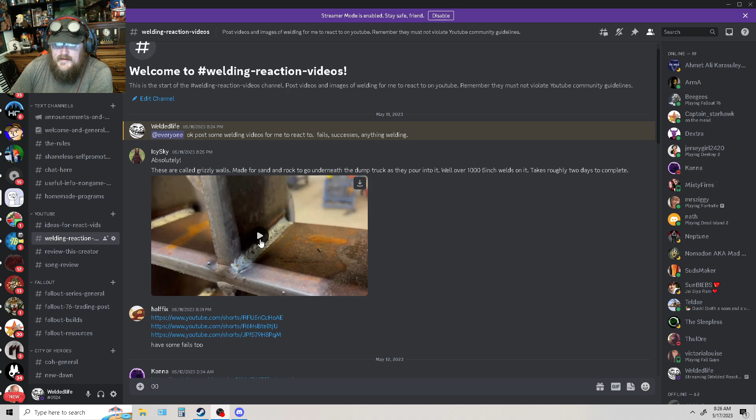No, so let's get right into this. See, and halffix has got some I'm looking forward to, God only knows whatever he's going to send. Let's see. Hold on, no, we got to full screen that right there. There we go.

Volume from... wow, that's impressive. We'll probably have to play a couple times. That is one hell of a support structure. That's not going any damn where. I mean, just look at them welds. Those beautiful, beautiful welds. You know, if you look close, you don't see really any undercut because you... come on now, cooperate.

Like even when you go back to like here, here's a good one, got a good shot of it. It's not really a clear image. I wish I could get it to just go to a clear image. If I can get to the halfway point between some of these, makes it kind of hard to see.

You don't see any undercut up here, which would be where the metal's burning away or melting down into your weld pool, which means they're getting enough metal into the weld to fuse it. Those little ones look fast to travel, and I say that because those are a little more arrow pointed, a little arrowhead, when they should be more stacked dimes. But apart from that, that looks really impressive, and what you're going to get there is a lot of solid structure.

I guess from the description it sounds like this goes up, they roll the trucks up over it on the gravel. I guess this is in the gravel when they roll the dump trucks up on top of it, and that's laying down, and they roll the dump truck or whatever on top of it. They fill it with sand and gravel. That gives it structure underneath to keep it from sinking down into the mud or gravel, or I guess, I don't know.

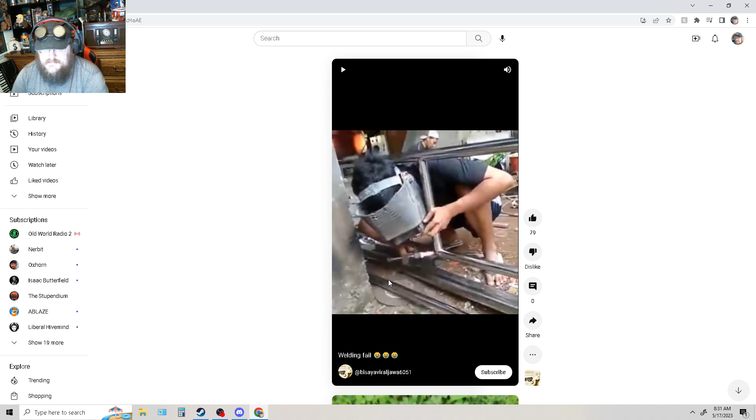He's TIG welding, okay, at least he's wearing a hood. Oh God, I didn't notice the pipe in the back. Oh. Oh, Lord.

Well, go ahead and keep welding it, buddy, might as well. I'm sure they'll get the pig grease and they'll lube up your head and they'll get it out of there. If he's dumb enough not to wear proper equipment to weld in, then go ahead and weld the rest of that up, and y'all just leave him for dead, because he's going to be that way anyhow.

God, that's terrible, it's on so many levels. It's terrible. I need to wash my mouth out from that one. And we still got more. Let's see, is that it?

So now, instead of going and getting something to protect himself with, here, let me bring this dangerous ass angle grinder over here. We went from Tweedledum to Tweedledummer. Tweedle dip and tweedle shit. Okay?

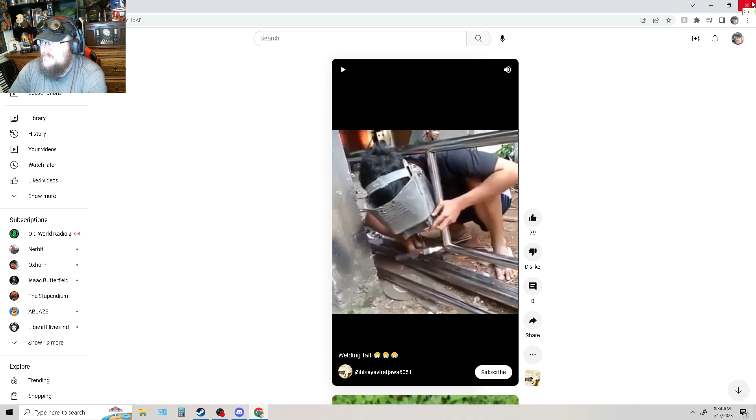Lord Father in heaven, please protect these idiots, because they sure as shit don't know how to protect themselves. Amen. I can't even look at it anymore, it makes me sick to my damn stomach.

Alright, halffix, you jackass. Alright, let's see something else. That was, oh, good Lord. Let's see the next one. Let's see what you got.

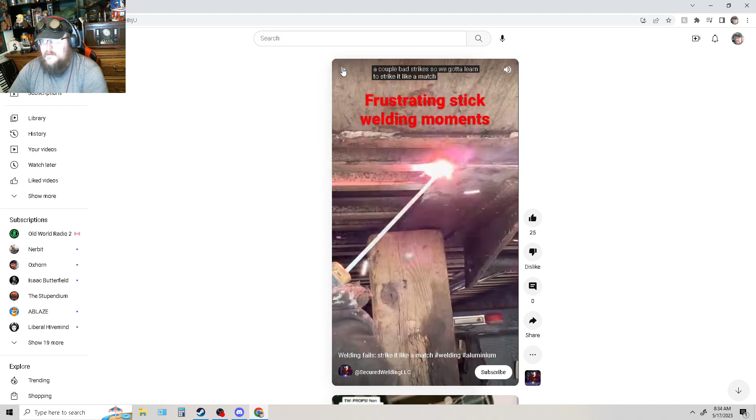As you can see in the beginning, we have a couple bad strikes, so we got to learn to strike it like a match. Hold the... but this is an aluminum welding rod as well. Aluminum welding rod? As you can see in the beginning, we have a couple bad strikes, so aluminum welding rod.

I've tried it, I've never found an aluminum welding rod that works. Yeah.

What I am seeing here in this video, so much to be said.

This looks like steel, this doesn't look like aluminum. He's up under a vehicle. I think, judging from that, he's under a vehicle. I don't know what he's up under. That would be aluminum - it looks like something structural from the I-beam look of the stuff above him. Why is he using aluminum?

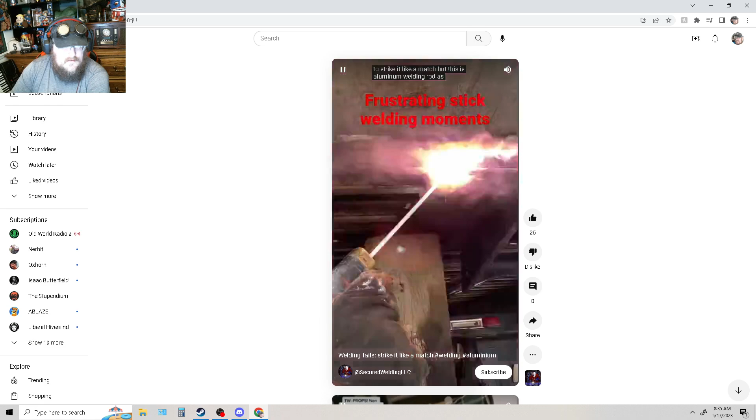As you can see in the beginning, we have a couple bad strikes, so we got to learn to strike it like a match. This is an aluminum welding rod as well. It's burning through so quick.

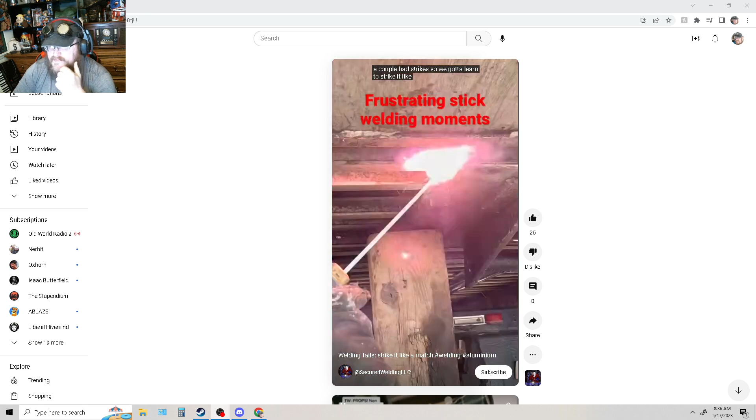As you can see in the beginning, there's a couple bad little strikes, you know. We got to learn to strike it like a match. This is an aluminum welding rod as well. Use it to plug the aluminum holes. I don't get what that's supposed to be for.

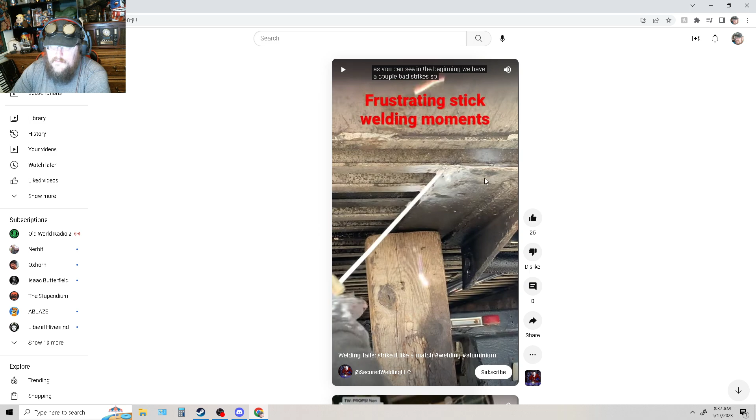Who's teaching these welders? Is it like old people who didn't know how to weld out on the farm decided, hey, you know what, tell you what, Sonny, we're going to the farm, I'm gonna teach you how to weld. And he got some old 6013, or I guess it was old 6011, for some AC welding. Got the old AC welder out and showed him how to weld with that, and he got all right with it. And Grandpa said, well, there you go, that's all I can show you. And he said, I'm a TIG welder now.

I was gonna weld aluminum with fucking MIG wire, which I have aluminum MIG wire, I haven't tried it yet. I'm eager to try it, but I will try anything when it comes to welding, but I usually have no hope in it. You're absolutely right, Icy, it's an absolute clusterfuck. It was an absolute clusterfuck.

Ugh, God, all right, what's next?

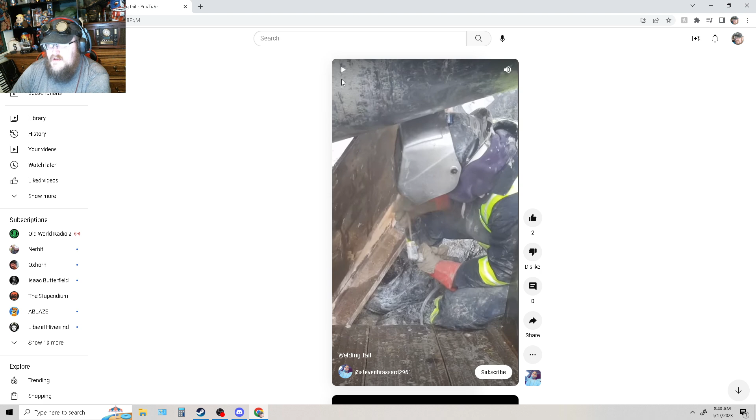Why would you do that? Jump with it like he's afraid to stick the welding rod into the stick holder. It's like he jumps and it's like, oh, I think this, I'm okay.

No, I don't believe it's an actual welding fail. I believe this was staged to look like a clusterfuck, staged to look like a suck bucket, and it's not a suck bucket, it's a fake suck bucket. That's fake puke in the suck bucket. Calling bullshit.

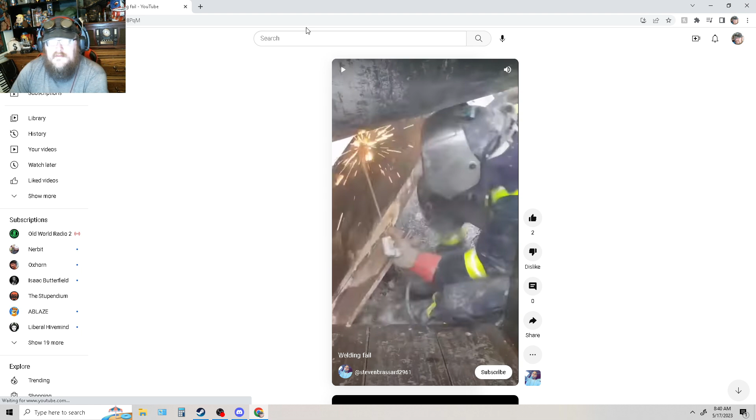Alright, what else y'all got for me today? Let's see here.

How much are they worth? A lot more than they believe. How much do you think you're worth? If I can't really see his weld too well, I wish I could see his weld first.

I'm not a big fan of hood covers like this, where they have the extra plate or whatever, because they're laying on their side or what have you. And these people look at their welds and say, well, you're worth X amount of dollars. Okay, let's see what he says.

What do you think you're worth an hour to come weld for me? $32.50, no per diem? 100 per diem? About 30 even, 110 per diem. How much? Clearly that kid knew what he's been looking at welding jobs and seeing what they pay.

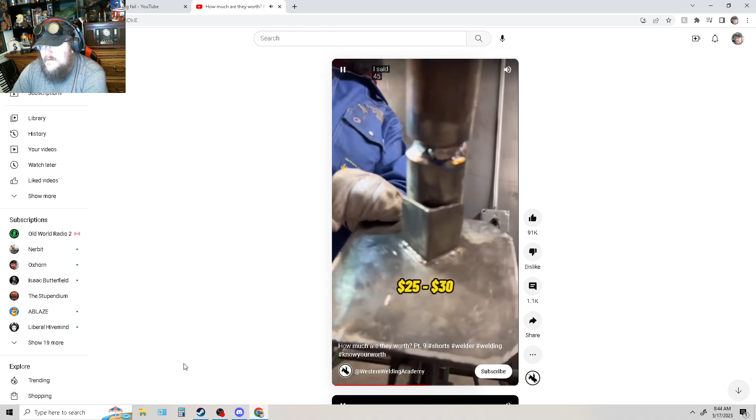Terrible. Let's see. How much is this next one worth? How much do you think you're worth an hour if you were to come weld for me? I'd say 25, 30. He's not bad. He's doing more than 30, he's like 40. 24 an hour, 24, $100 a day per diem. What?

Actually, I wish it won't let me go back. How much do you think you're worth an hour to come weld for me? 20 bucks? Yeah, she's selling herself short.

Actually, from what I can see, her welds don't look bad. Of course, I don't have a close-up look, but they look pretty decent. She is selling herself way short. And honestly, truth be told, they will pay women more per hour to go weld, to get them into the job market, because there's not a lot of women welders. Women don't generally, you don't see a lot of them pursuing a career.

I was fortunate enough to meet one female who came through our program at WKCTC. Fantastic young lady, actually I think she was older than me at the time, of course this has been a few years ago. She went out to run a project out on the Kentucky Dam, I believe, if memory serves me right. She got her stick welding certification and went out and started working on the Kentucky Dam, and went from just a welder out there with the Iron Workers Union to running that shit out there, making a killing. She was a very good welder.

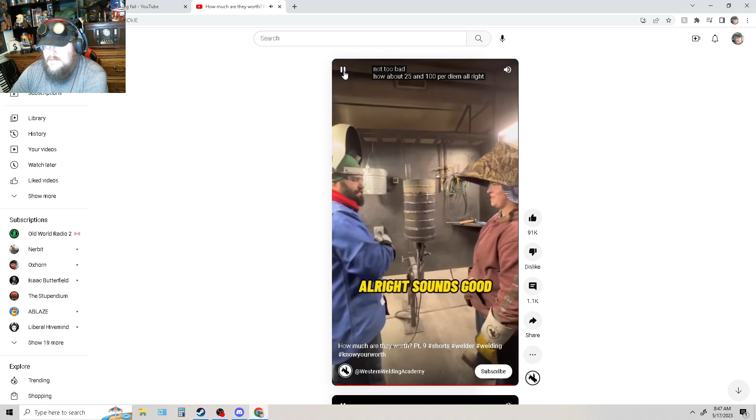So $20 an hour, she's worth 25 to 30. 20 even? Not too bad. How about 25 and 100 per diem? Alright, how much do you think you're worth?

First guy, they oversold him. His stuff looks pretty good, but I don't see a whole. I can't really get a good look at the weld. But a lot of welders, when they come through school and stuff, it's good. I think Western Welding Academy.

So looking at this, I'm glad that they tell them what they're worth. And it also regionally will depend on how much you're worth, will determine how much you're worth.

Being a stick welder here in Western Kentucky is not worth as much as being a stick welder out on the West Coast, because the West Coast wants less of, they want more green or environmentally friendly stuff, and they see that smoke coming off that flux, and they're like, oh, pollution. But they don't realize that TIG is done with argon, and they're already breathing argon. It's already in the air. You're not changing anything. It's actually extracted from the air when they make oxygen tanks for hospitals and stuff like that, when they funnel off and do all this. So there you have it.

So that one, I'm glad that there's a school that kind of tries to tell them what they're worth. This, of course, you can tell it's stick welding, $25 an hour stick welding. That's just your run of the mill, people showed you how to do it out on the tractors, welding together old frames. Oh Lord, alright, let's go on to the next one.

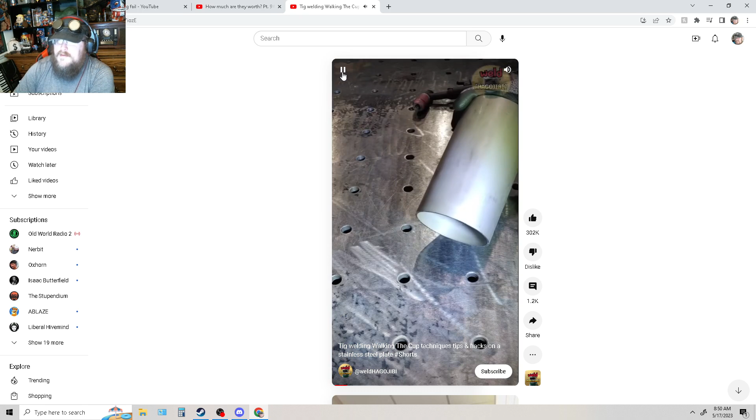No, okay, that technique, it's like walking the cup. It's basically like when you take a box and you have the two corners, and you pick one up and you do it like that. It weaves the tungsten tip in a certain pattern that you get that, and yeah, it looks pretty. And I don't know how well they hold up. I've never had to bend test somebody's TIG weld like that.

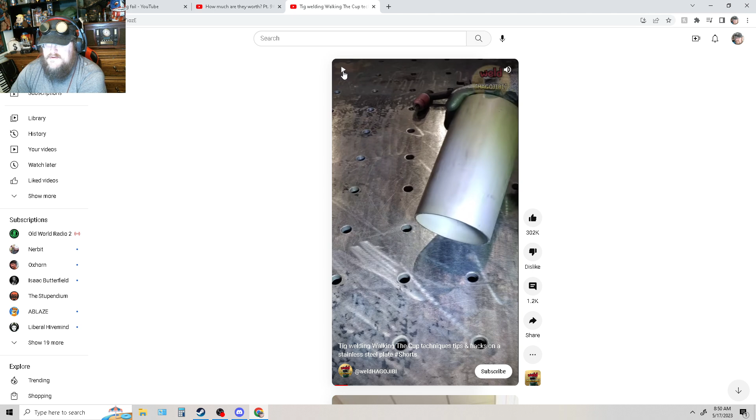So they're going to show you how it's done. Okay, show me how it's done. Seems like a lot of extra movement. You could just go bit, bit, bit, bit, bit, bit, you know.

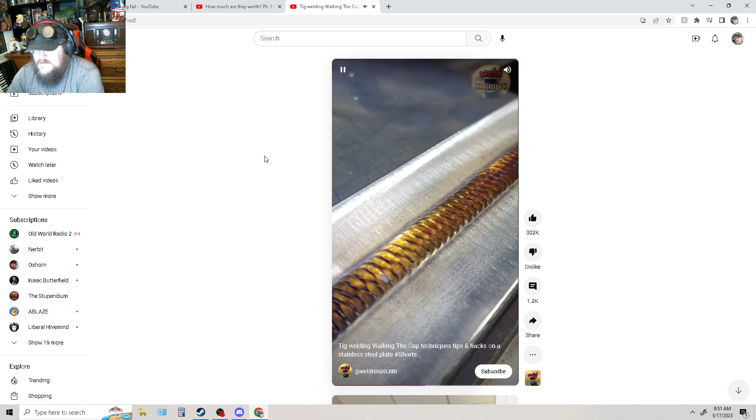But the minute you slow your ass down, well, they're not even using filler rod. Not even using filler rod. Yeah, of course. Oh, they just drag the rod. Okay, it just runs across the rod and fills it in. Yeah, I've never seen anybody really do this, and people brag about being able to do it.

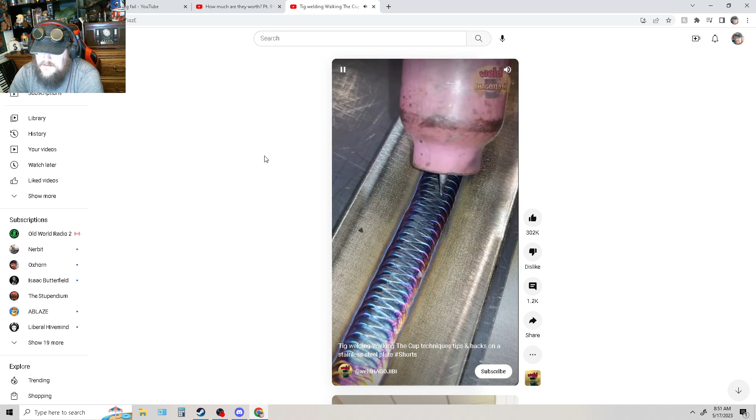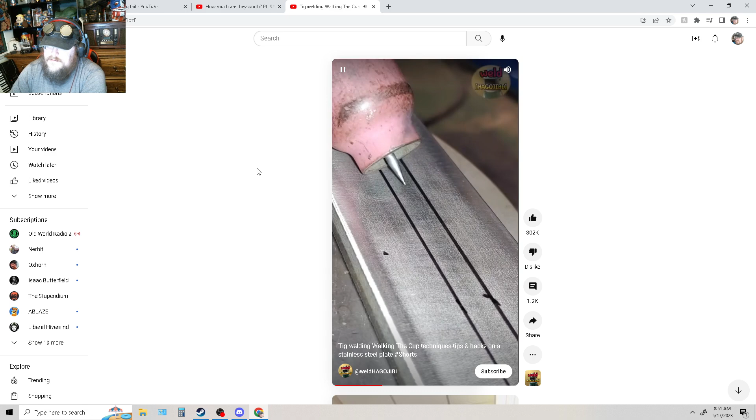It lays a really pretty weld. It does, it does look pretty. Everybody loves the rainbow pattern color it leaves from the heating and cooling of the metal at certain temperatures. See, it looks good.

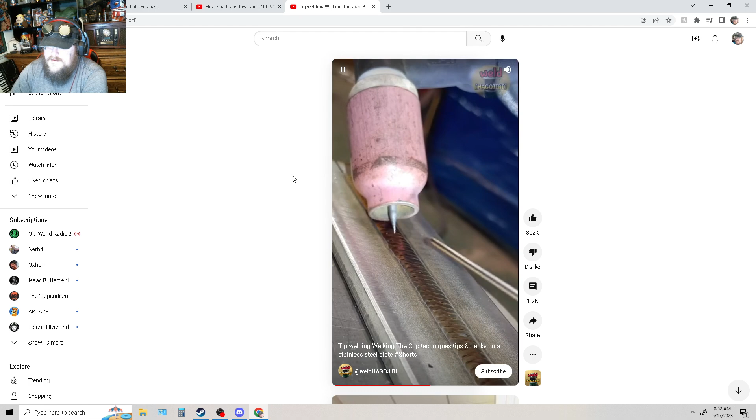It's just a very showy and flashy thing to do. It's literally that's what it is. It's not a bad way to weld, it's just very flashy, like, look at me, let's me show off how good I am at welding.

But realize you're going to do all that twisting and turning from back here on the handle. There are TIG torches you can get that allow you to hold it like a pen, which would be more ideal for doing that weave pattern. There are TIG torches like that. Otherwise you're going to have to hold up here, and if your cable slips coming off the back of that torch, it pulls that weld.

That's another reason I'm just like, just weld it regular. Don't try to do the fancy stuff. You're getting just as good a weld doing it without the fancy stuff, and lay however many bead lines you need down, stack them up. You're trying to overlap two bead welds and just be done twice as fast.

I'd rather have it done at regular speed for the two bead welds and have them overlap like they should. And there's nothing wrong with this if you can do it.

I'm sure the welders come out in here and go, "What the hell are you talking about, Welded Life? Why are you being a dick? Why are you coming down on me?" Well,

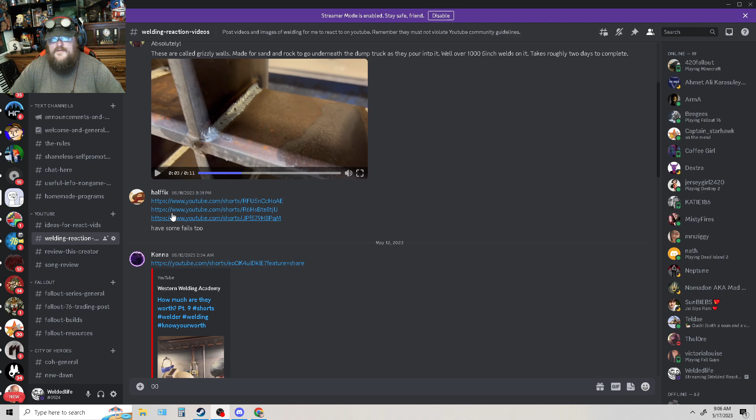And Halffix, of course, was a Fallout 76 player, and Icy Sky is a Fallout 76 guy. I'd like to get all y'all into City of Heroes too, because I really like what the Welded Fam does.

All right, mesmerizing weld. This is one of those things, like people who watch cyst videos or pimple pop videos. I can already tell what this is going to be. It's going to be a machine weld, possibly, or somebody's doing it by hand. The precision right there makes me think it's a machine weld. But let's...

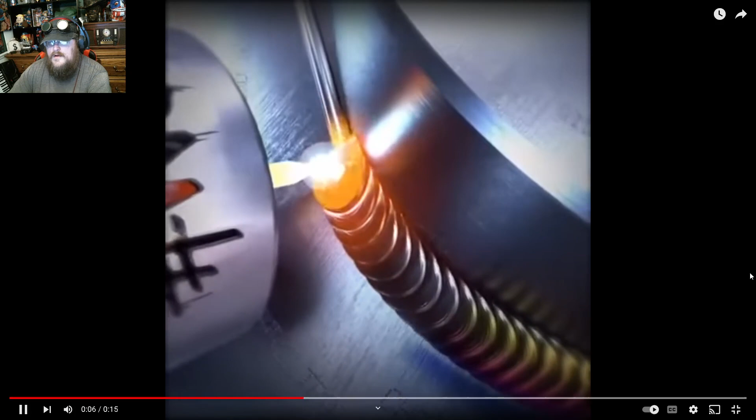Do we have any sound? No sound? Oh, I don't get to hear the sound. That tip looks like it's way too close, but it's stacking nice, so they're running low amps and dabbing. This is by hand.

Oh, it is 'How to kill all mosquitoes in the area in 90 seconds.' In 90 seconds? Well, if whatever you're using to kill mosquitoes in the area takes 90 seconds, I don't want it anywhere near anything living on the planet. Okay, bud. But...

It's just a beautiful thing to watch. I could watch this on loop. I could do this as a screensaver and just get that little area there and work that video so there's no fuzz at the beginning, where it fades out at the end and kind of gets fuzzy at the end. Just work it from right there, and find a place where it's just going to roll into it.

Only thing you'd notice is if you ever pay attention to that, or the printing on the metal on either side. Oh, it's gorgeous, and it's stainless. I'd imagine this is stainless steel just from the look of it, and the way any metal, any steel in general, is going to pick up those colors like that. But I want to think this is probably stainless, just because this polish has a brushed nickel look, the brushed metal look. It's got angles. It's probably stainless. This looks like some kind of machined part for something that they're probably not going to want to rust up, so it's probably stainless.

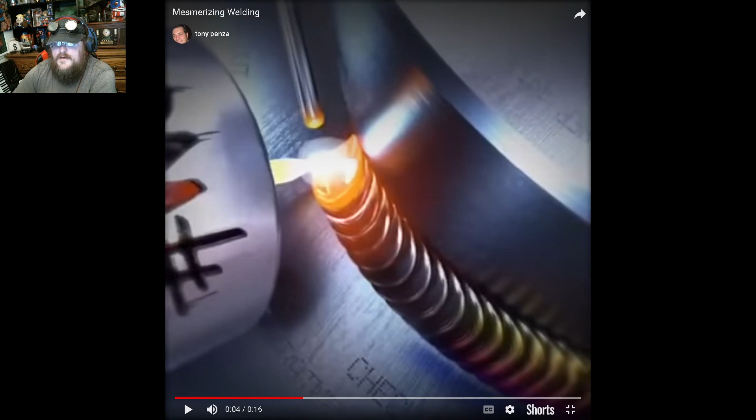Alright, here we go. So here's a good example, like when you're looking at this, we'll pull this out of here, get rid of that there. Let's pull up the video, and we'll pull up this, and we'll size it a little better. Maybe I can size it just a little bit. There we go. So this gives a good chance to look at the yellow, this residual heat and the colors it turns it.

Like when you watched Forged in Fire, you always hear about them. They'll quench the blade in the oil. It'll get really hard and brittle, and if they drop it or were to use it right then, like to hack at something, odds are the blade would shatter because it's become brittle. They superheated it to dark yellow, bright yellow, somewhere in this range, and then dunked it. I mean, I've done a quench as low as 1700 degrees. A lot of them like to do the bright yellow because it's just more spread out when they get.

Within that, it cools down, it comes back down to its gray with the black, or the regular gray. And then they talk about bringing it up to a dark straw or a light straw color. You want it somewhere between these two when you temper it. A strawberry blonde is basically what it kind of looks like.

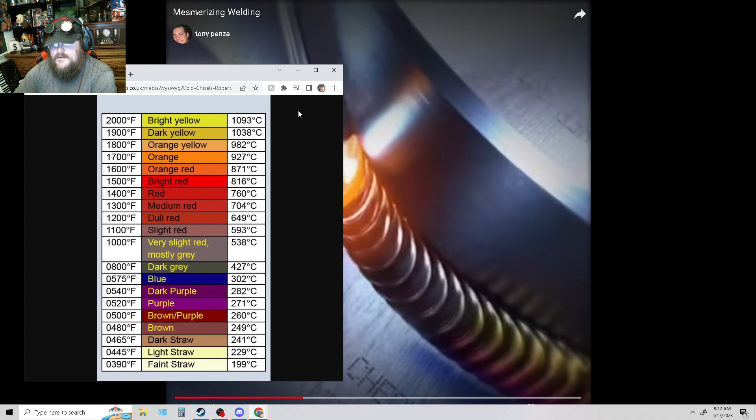But what we got here, down here, I can see purples and residual heat. It's cool where it cooled down first, but it stayed hotter up here. As you watch, this is what cools first and what stays the hottest, and the heat's traveling up this way. And it's really neat when you realize that went to 2,000 degrees right there. Of course, this up here is 2,500 degrees. If you look at the weld itself, I don't think that's right. That doesn't seem right to me.

When you heat steel, you start with a blowtorch or whatever you're using and intensify the heat. Sometimes you'll get it hot and think it doesn't look like much, maybe a slight red, but then all of a sudden it starts to get real red, and then yellow and orange, using a forge.

I'm gonna redo my forge here soon. I'm gonna get some of that Kaowool inside of it, making it a lot lighter and more portable. I'm gonna put a tray on it too, so it can house my propane tank. I use a small propane tank, not one of those big ones, but I want a place for it to sit underneath.

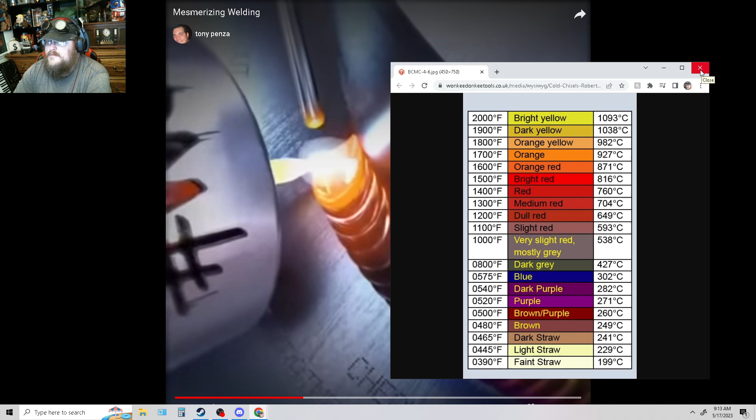So that's basically what you're seeing there, and that's where you're getting the heat that drives that color. If there's any question about that, it's always a beautiful thing to see. Like I said, I am very grateful to have seen that video.

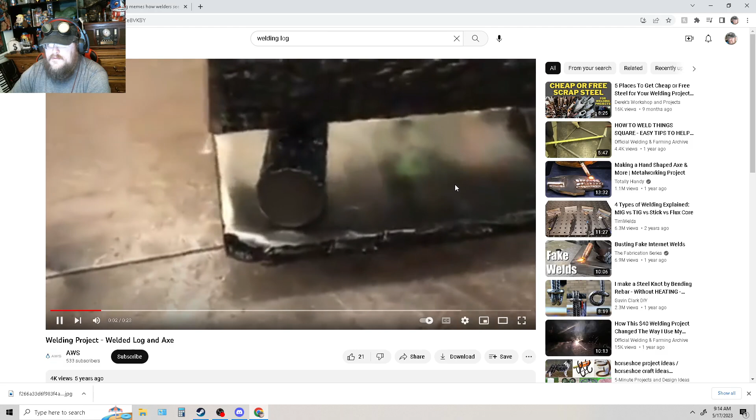Let me look up something here on YouTube, see if I can find it. Somebody did, here it is. And this is not the only one, I've seen others like this, where they've spent time making an actual log. It looks really good, I've seen better, but that one is still amazing. I'm not knocking this guy here on AWS, American Welding Society. Is that actually AWS? AWS Speed Glass? What? Well, I don't think this is the actual American Welding Society.

Okay, let's get back to these. Yeah, yes, I have caught fire other times. That was just the most remarkable burn I'd ever received, just so you know. Because my shirt wasn't pure cotton, it was a poly-cotton blend, it fused to my skin in spots, and I had to rip it off, and chunks of me came off with it. I kept that shirt, trimmed it up, patched it in the front, and stitched it up just so I could say, this is my burned shirt, this is for when I want to go get myself set on fire.

Alright, next. When I'm here, it's like nothing else matters. It's like all the troubles in the world disappear for a split second. It's just peace, it's peace. Just me and the beautiful white light. Until that first bit of flux lands in your ear, and then all hell breaks loose.

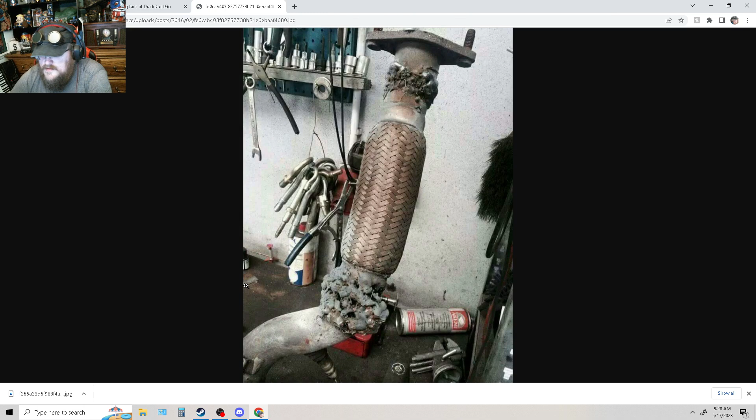Images, welding fails, oh the fun begins. What in the corn cob motherfucking bullshit is that? Will they top it off with JB Weld in there or what? Let's look at this, just put a little primer on there, grind a little bit, throw a little primer on it, nobody will ever know. The fuck is that supposed to be? I mean this looks probably something automotive, I'd wager, but what?

Oh. I guess everybody just wanted to send me videos. Y'all could have sent me these pictures too. Alright, let's see what we got next in this... Oh, Lord. I'm going to say...

Were you welding downhill or something, trying to vertical weld downhill? Had to restart a whole bunch? We just start a little weld, I'll build it out from the sides, and then we'll try to weld. I don't know what the hell happened here. This is... oh, it makes me nauseous to look at. Like I've done welds that just start getting too hot or running funny, and you're just like, what are you gonna do? I mean, nothing you can do, right? Well, fix it, but that is just on a whole another level.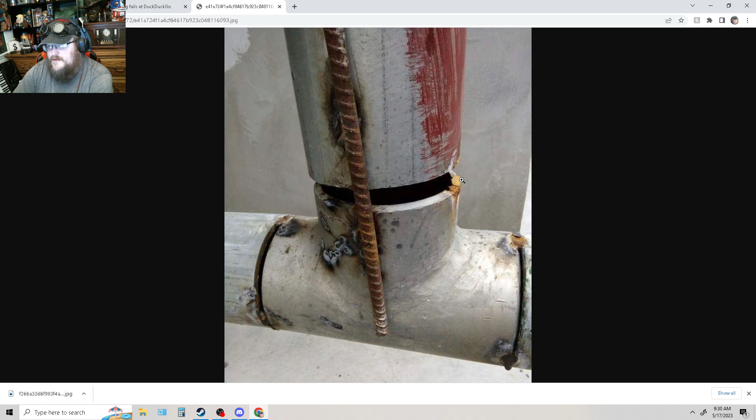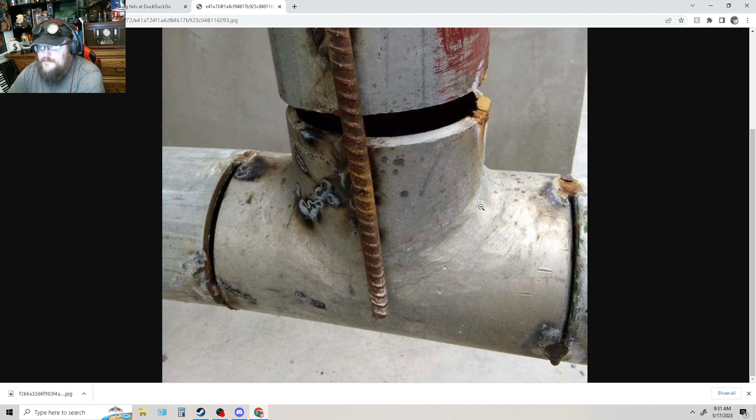What? You tack welded a rebar on to guide your piece into place, to hold it in place. What? Maybe he tacked this on here to hold this piece in place for all these welds. Even still, when you go to weld that to that, you're going to need to make sure you grind that piece flush. He's cut it off of something else too. See, here's what's happened, folks. I can see what was to be a pure mechanical failure. He welded that, I can't tell if maybe he even welded it up here. It's been cut free, like he tacked it — here's some tack weld, tack weld, tack weld, tack weld — to hold the pipe in place, right?

Okay. And he tacked it, he went to that first.

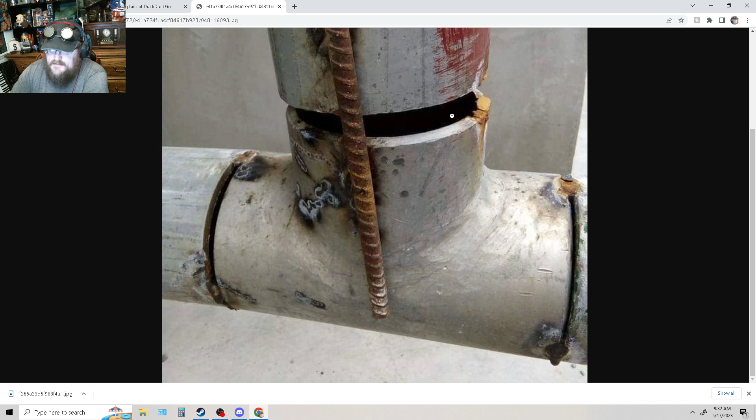But so many questions. Is he gonna need a ring, or what? I would check, dude, you're gonna need to check your blueprints. The ones that don't fit, you may have to put a piece over it and weld on. I don't know if it's gonna require a smooth transition. Some things you can't just — I can't remember what they're called — a piece around it, a metal piece that goes around it. Slide it on, slide it down into place, then zip around the top, zip around the bottom, and it's welded on. I'll tack it in place and then do that. But he has clearly had to cut that loose from there to make that fit to there — definitely check the specs and go see your manager.

That rebar is unnecessary. You already got it tacked in place. Why did you — maybe he tacked that so he could set it up there right. I don't understand, why would you do this? Oh, so many reasons, I'm gonna just scream. And rebar's hard to weld — well, it's not hard to weld, it's just ill-advised. Unless you know what you're doing. And clearly they've gotten desperate, so they obviously don't know what they're doing.

I don't like pipe welding. I hate pipe welding, that makes me nauseous to think about. Alright, let's see what we got here. What is this? Oh, it ate away at the end there. Oof, what are you... I don't know what that is.

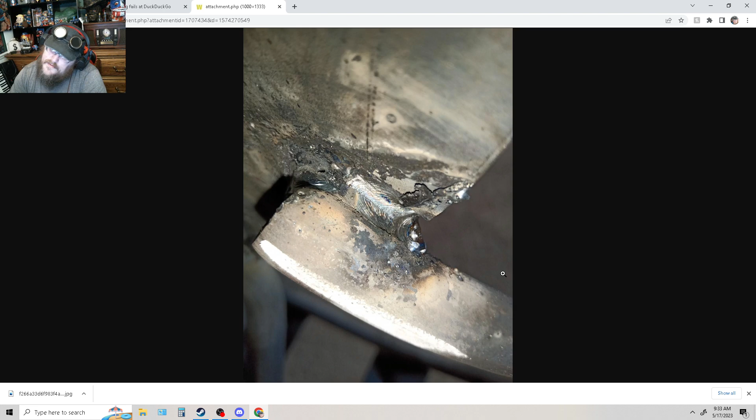But no, I mean, you had the heat on too much, and the metal's too thin over here for it to be coming all the way out. Shouldn't have come all the way out. You probably should have come all the way down. Maybe — I don't know what you should have done there, but whatever you did, you done fucked up. And there's a sharp edge down there. Fix it.

Probably have to use some MIG and build it up — little pop, pop, pop, get you some metal on there. And I would build it back up this way, because this is what's going to get eaten up every time you do something with that.

Nope, nope. I've seen some shit welds in my day, and some of them are still there at the school. They kept them on the failure trophy wall. There's a whole metal rack in the first classroom that has a bunch of shit welds. Some good welds on there too, but shit welds there as well — like the wall of fails, the shelf of fails. I don't call that a failure, except for...

It looks pretty good. You had a little issue right in here you could smooth out. Were you trying to see how that pattern is? You remember that video we watched earlier? That one right here.

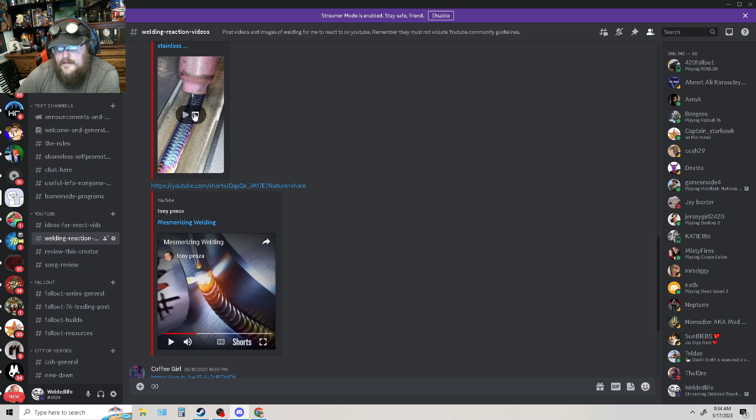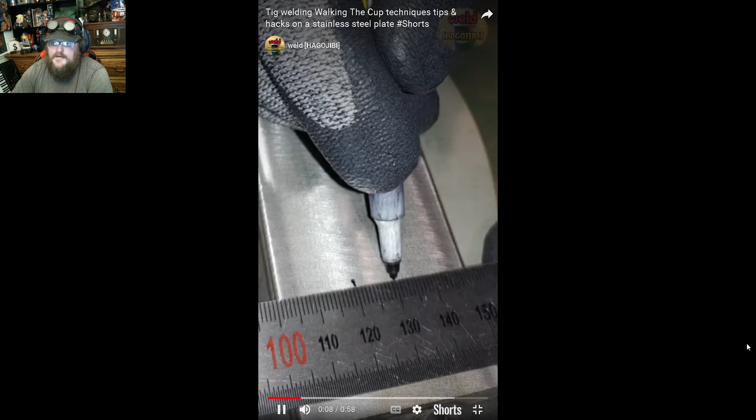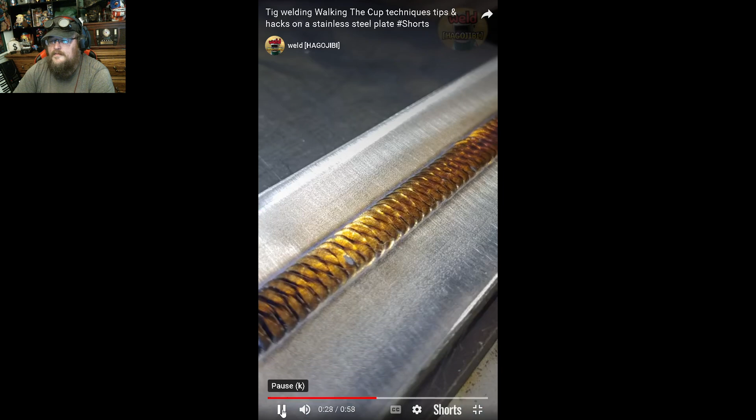This one right here. See that little pattern? Watch the pattern. Come on, yeah, okay, we see it. Line your stuff up. That little pattern right there that it leaves. Let's see if I can catch it on the screen. Show me the pattern, show me the money. Ah, see that little pattern right there? It looks familiar, doesn't it? Looks an awful lot like that.

Well, that and that are similar, only in that they both tried to do the same thing.

What up, Captain? I'm not going to be on the Discord today for right now. I'm doing this portion of the video without audio, without Discord, because we're doing fails. I got one more fail to watch, or success. It looks like it's going to be a success. But I thought I'd look at some weld fail pictures, and that ain't going to hold up.

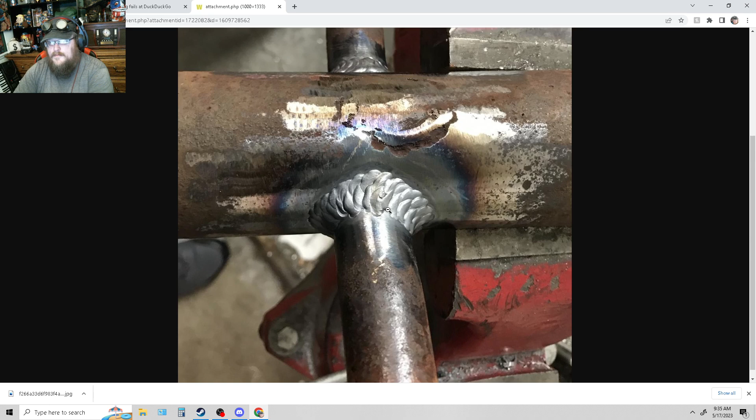That spot right there where my mouse is, it's not got penetration. It should look like that, the one on either side of it. They're trying to do that rocking technique, and it's not grabbing. Some of your welds that overlap aren't grabbing fully. It should look smooth, like butter. Right there, and it ain't. You've got a lot of ripples in your weld. So whoever's doing this is trying to do that rocking technique to make it look cool, and they're not.

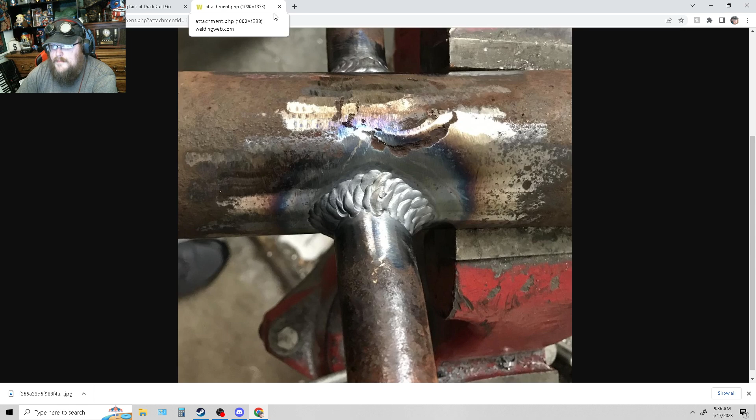This weld will probably hold for a time. I'm hoping it's not, like a pipe fitting thing. Hoping this is some kind of structural thing, or maybe not structural. Well, hopefully it's structural or something that's going to last, because if it's got any kind of high pressure on it, it's probably not going to hold. Maybe this is an art piece, hopefully. Awful.

Let's see, what else we got on the... What am I looking... What? Oh, Lord.

But somebody's getting fired probably over this, or they're going to be off the job for a little bit. They're going to be unemployed, temporarily not on site to earn their pay. MIG wire, and the spools that produce this much wire are fucking expensive. Fucking expensive. Let's say it again. Fucking expensive.

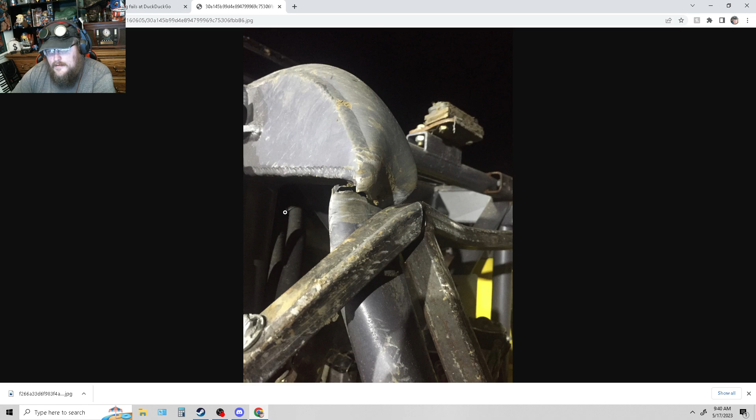Oh, see, this isn't a welding fail, but I like that they put that on there because I can see this looks like this was all one piece. It was welded here and welded here. The welds held up, ha ha, but that ripped away. That metal ripped away. Why was this not welded? What the hell? This looks like it belongs attached to that.

Ugh, anyway. Ugh. Gross.

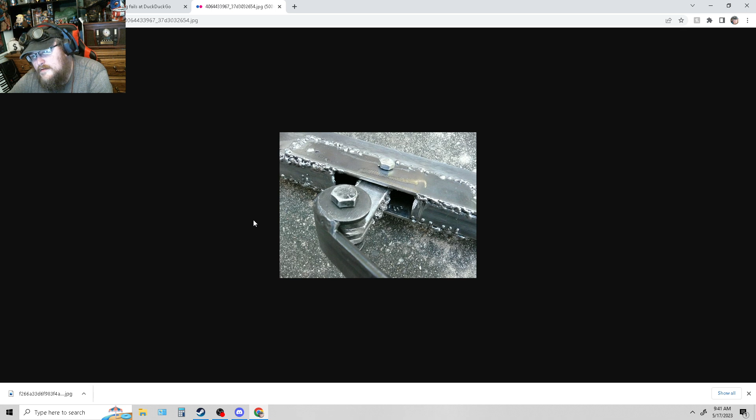What? What? What? Oh, what was it? I just want...

The welder took a picture of this because they were proud of it, I'm sure. Looky what I made, mommy.

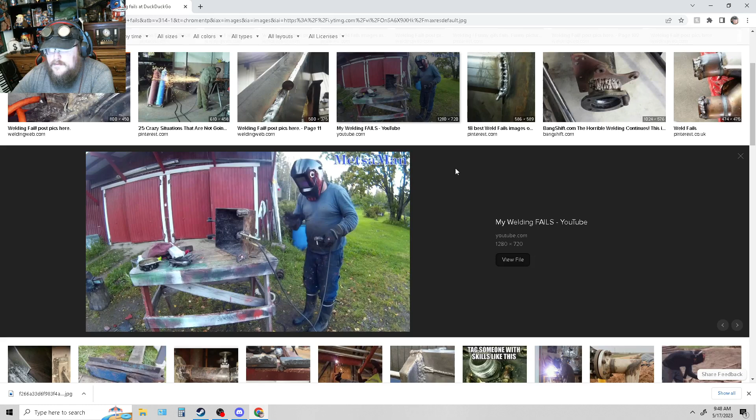What? I don't understand what the weld fails. Don't. Oh, what?

Well, this weld looks like it's going to just lash out and bite you, with some savage ass teeth. Lordy mercy.

Hey, I put that new exhaust on for you. Why would you take a picture of this to show? Maybe it's the customer showing this off, going like, yeah, no. No, man, that's no.

What? That looks like... that, I don't know what that is. Looks kind of okay. This looks like a hot mess. It doesn't look like it grabbed up on the corner of the piece over here. I can't really see, the image is too small.

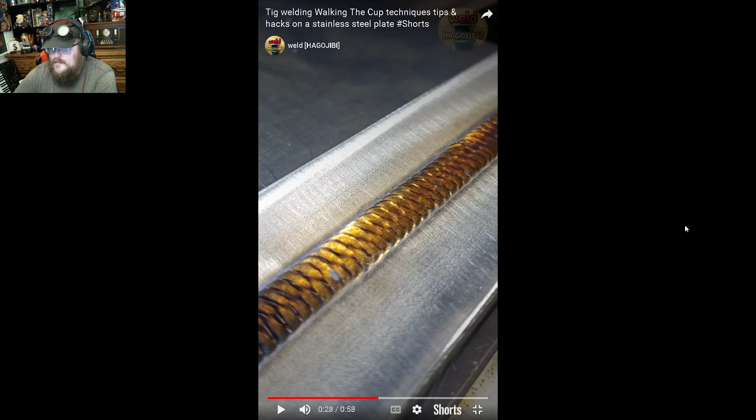Alright, for the pièce de résistance, it's time to review. You guessed it: Handmade Steel got dragon. What?

Got dragon, okay, Game of Thrones dragon. Okay, it's like got dragon, that makes no sense. Okay, see how much I've never watched Game of Thrones. Don't judge me. I played Dungeons and Dragons growing up in high school, middle school, some college, and we just played it way too fucking much. I got burnt out on that whole era.

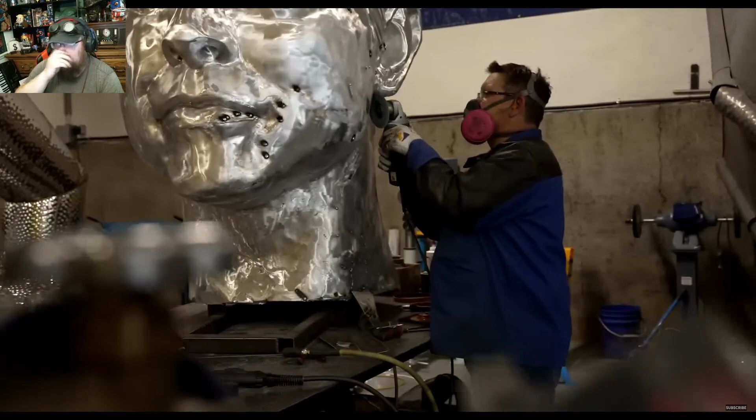T-Rex. I had a hot rod shop before this. My artwork started to take off and it became full-time work for me, and it wasn't something I could do on the side with a hot rod shop anymore. So I sold out to my partners and we relocated out to here. Now we're...

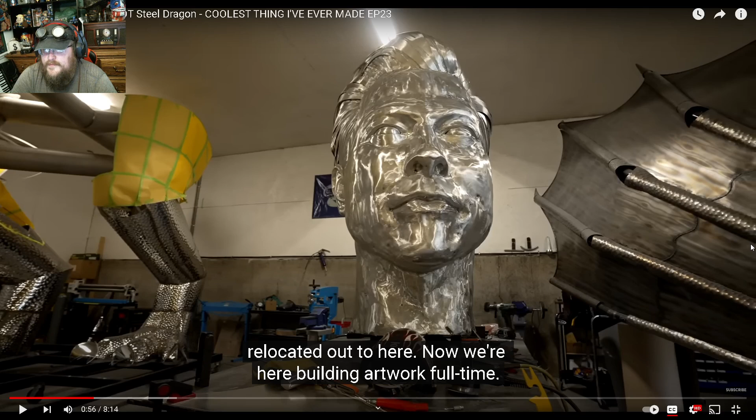The face looks familiar, but I can't think of who it is. ...here building artwork full-time.

One of the biggest opportunities back in 2011, I received...

That is fucking awesome. A little cartoony on the face side of things. You could have done a little better, but...

A phone call from Dollywood. But then again, once again, he's from Vancouver, Canada, so I don't expect him to get all into the bald eagle side of things where it's got to be a certain way. It's got to look epic, it's got to look awesome, America, you know. I don't expect that, he's Canadian.

I'm going to wait for the dogs to stop barking. Tennessee. Okay, let's see what we got.

They were building the world's first winged roller coaster in North America called the Wild Eagle. So they commissioned me to build this giant eagle. As my work started to become more popular, the opportunity arose to stop building cars and Chinese dragons, and focus on my dream of building large-scale artwork.

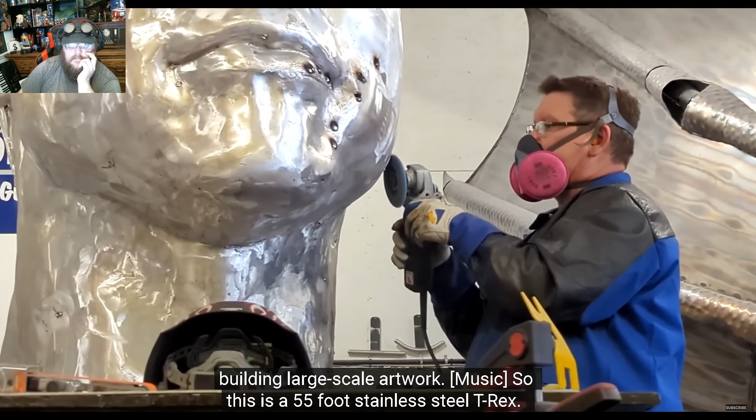So this is... okay, so we got a T-Rex here, and you can see the time and effort put into all the skin texturing. You can tell it's not patterned, like he hasn't done even spacing. He wants to make it look more realistic, to get the feel of natural, asymmetrical texture. And he's got the understructure in here to support it. That's really good, I love the way he's doing all the teeth.

I wonder what image he used to base his designs off of. The eyes, I think he does better eyes than most people do in sculpture, because the problem with eyes in any sculpture or painting or even games is the dead eye effect. Metal gives a little bit of shimmer that you expect to see, that little shimmer in people who are alive. It's the shimmer of the soul, if you will, or the shimmer of life. You expect to see that.

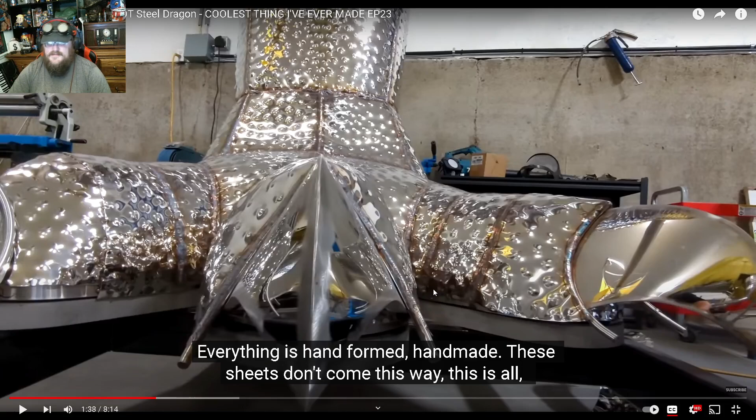So, very well done. This is a 55-foot stainless steel T-Rex, hand-formed, hand-made. These sheets don't come this way. Every one of these hammer marks is done with a power hammer.

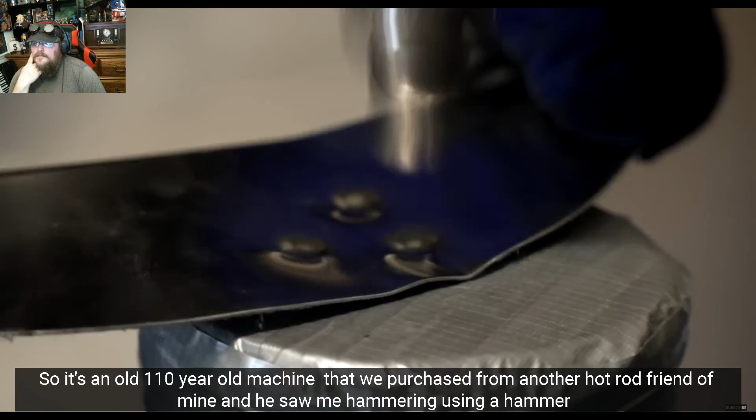It's an old 110-year-old machine that we purchased from another hot rod friend of mine. He saw me hammering using a hammer and a sandbag, and he's like, 'holy crap man, I've got a machine that'll do that for you.' What a lifesaver it was. This is just so much hammering and texturing to do, it takes hours and hours and hours per panel.

I'm thinking it's probably got about 3,000 to 4,000 square feet of stainless steel just to skin it.

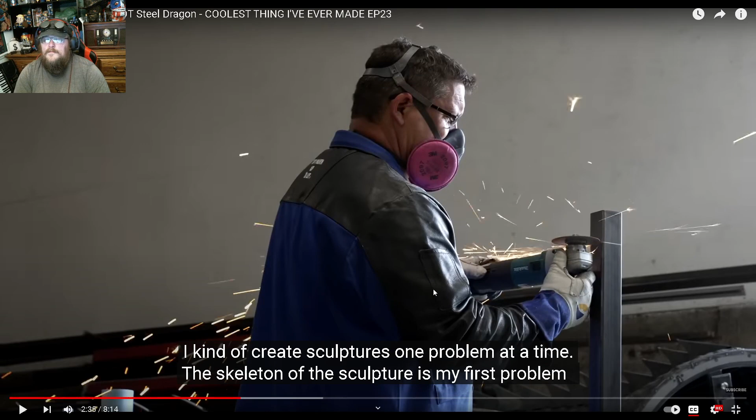I kind of create sculptures one problem at a time. The easiest thing to do is figure out the structure, the innards, and figure out the square footage of metal, since you know how much steel weighs. There's a measurement for that, and then you figure out how thick the skin or outer layer is, weigh it, and you know how much the frame weighs. The difference is what the skin weighs. If the skin weighs X amount, you know how many square feet make one pound of stainless steel at that thickness, and ta-da, that's how many square feet you've got based on weight. It should be pretty accurate.

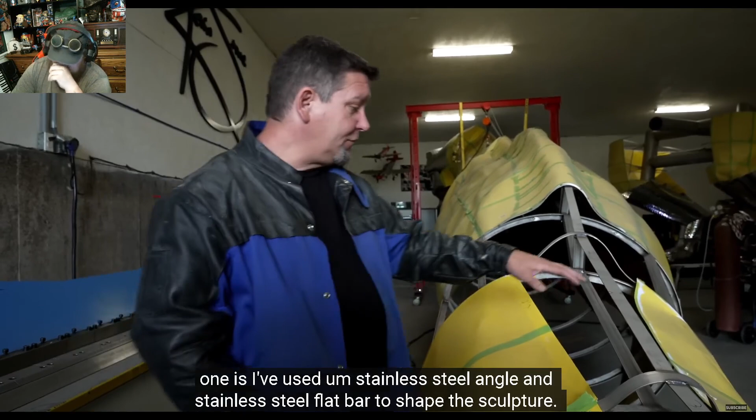The sculpture is my first problem, putting it together and engineering it. So what I've done for this one is use stainless steel angle and flat bar to shape the sculpture. I had these rings, you can see them in here, to give the overall shape for the tail and for the body. I look at each piece of the sculpture as a problem I have to solve. Learning it over the years in my whole career.

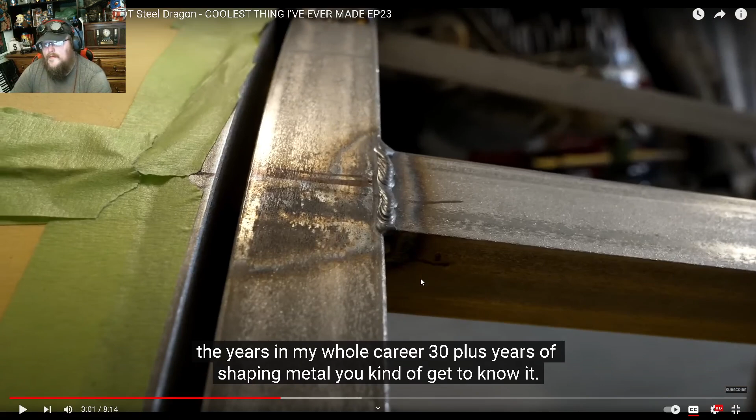Not bad looking, a little sketchy right there, but overall I'd be happy with that. It's not too far in, not right up there, drug in like that. If there's no undercut, he's doing very well there. I don't see any weld there though - I'd be welding every piece of this thing to make sure it stayed together.

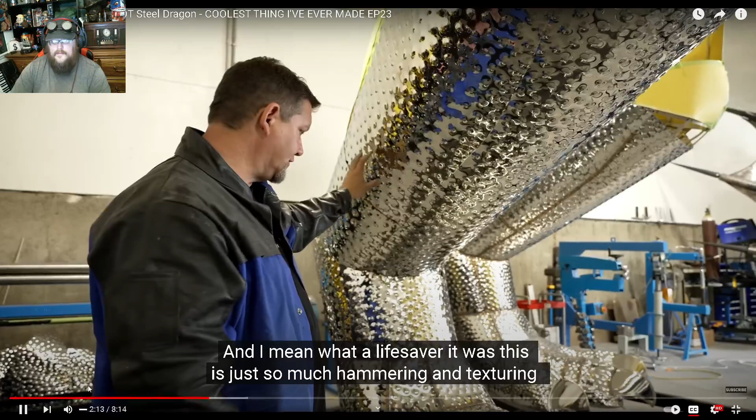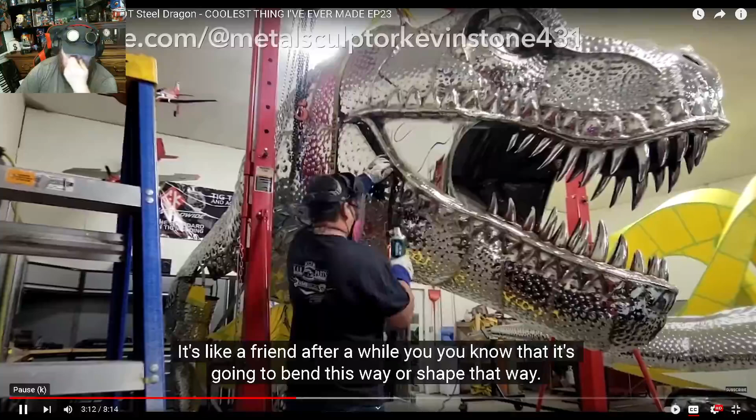I use it to give my overall shape for the tail and for the body. I kind of look at each piece of the sculpture as a problem I have to solve. Learning it over the years, 30 plus years of shaping metal, you get to know it - it's like a friend after a while. You know it's going to bend this way or shape that way. Designing is consuming - that's the only way I can describe it, because I live, eat, and sleep my sculptures.

Everybody asks, do you have to cut walls down to get your sculptures out? But everything I do has to fit through the doorway, and it's a 12 by 12 doorway - if it fits through the doorway, it'll fit on a truck and go down most highways and fit under most bridges. So we're pretty good there on a low bed trailer.

So this is probably the greatest sculpture I've ever done. This is almost a full-scale replica of a Game of Thrones dragon.

Just look at that big beastie motherfucker right there. That is - wow, just fucking wow. Wow.

I like the detail he has in the - I don't call it horns or the scales, whatever's causing these ridges and horn-like shapes. I'm loving the detail he's put into that. I'm wondering what he did - if it was cut with an angle grinder, cutting back to make highs and lows, or you can see a lot of his stuff is textured metal welded together.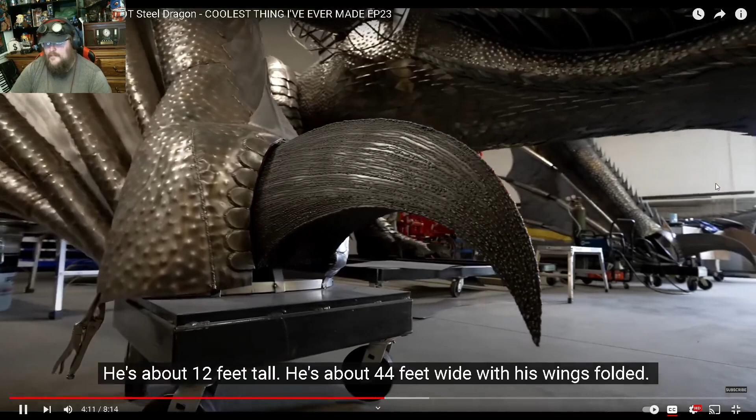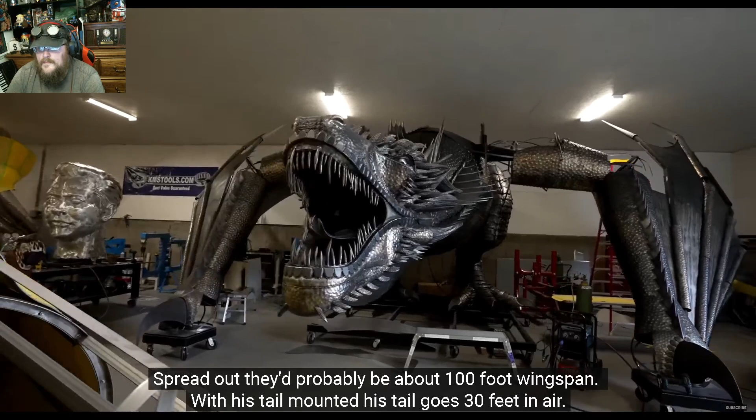It has been my most complicated, most detailed, and most time-consuming sculpture to date. 12 feet tall, 44 feet wide with his wings folded. Spread out they'd probably be about a 100-foot wingspan. With his tail mounted, his tail goes 30 feet in the air. Assembled, he's probably 15,000 pounds.

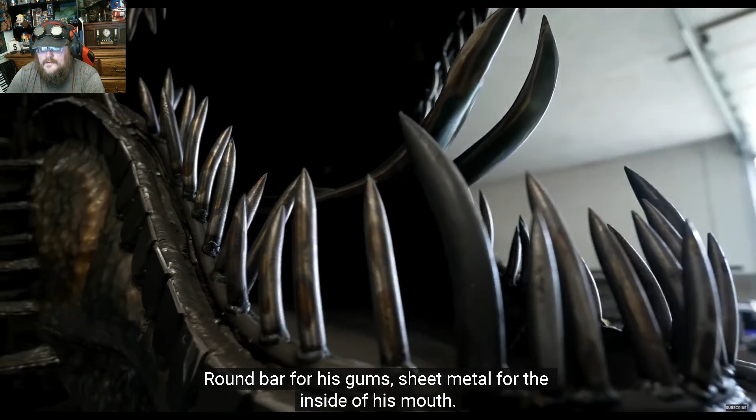So I started with the inside of the mouth and worked my way around using round bar. All the teeth were shaped, bent, and ground to points - round bar for his gums, sheet metal for the inside of his mouth. Up inside is the fire system at the corners of his mouth, so I have 2 electric igniters and the gas tube coming out of his mouth.

All the texture was done by welding and by round bar.

So you have 2 initial starters of the flame, and there's the big gas pipe - that's what sprays the big flame. It starts with little flames - there's a little spark gap right there with little sprayers that create a small flame, and that creates a big flame. So it's a combination of 2 little flames and a big gas pipe to make a big flame.

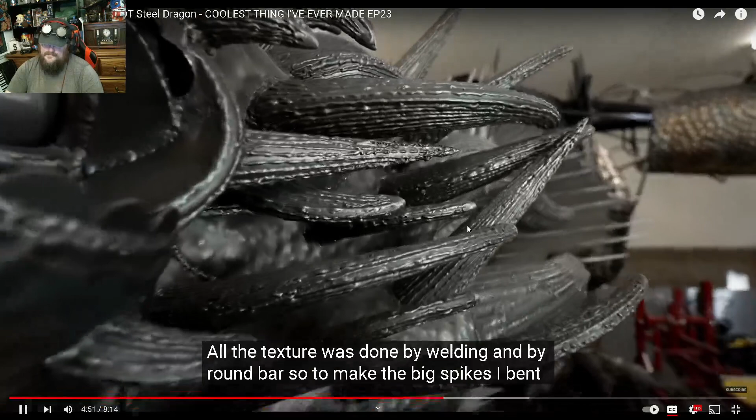All the texture was done by welding and round bar. To make the big spikes, I bent, curved, and welded together half-inch round bar. Then to give it all that texture and thickness, I just welded layers and layers and layers. I left the splatter, roughness, and texture because I thought that gave it a real horn kind of feel.

And then these are all made by hand, so each scale is laid out on a full sheet of metal. We draw them all with ink on the table.

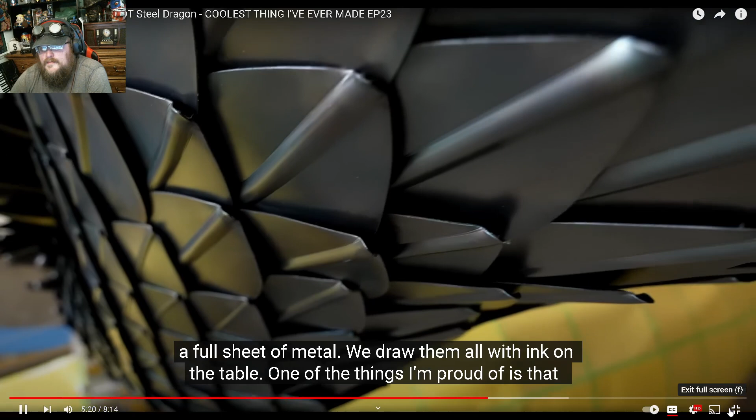Herein lies my issue with this, is that he did all this stuff to make the scales look real crisp and clean, but they're... and I understand these are all hand cut and hand done, whatever. Don't they need some real... they feel a little too clean. But that's just me.

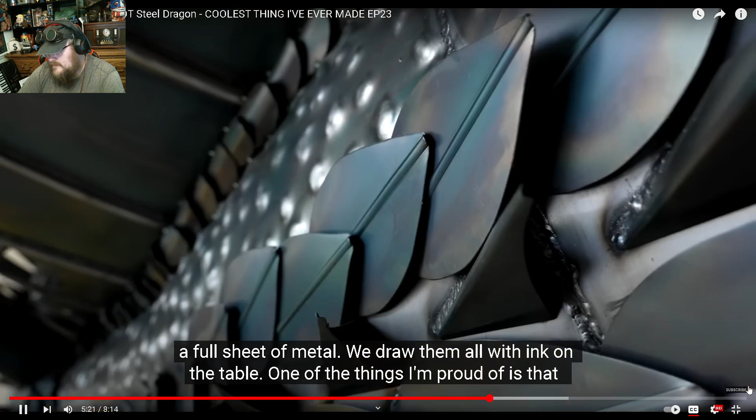Each sheet of metal, we draw them all with ink on the table, right in here. One of the things I'm proud of is that...

Ooh, I don't like that right there. Oh.

What's funny is you could come back once you got all your welds laid in with stick or MIG or whatever you're welding with, come back with TIG and go back over it, and you could have smoothed all of it out fairly well, then touch it with the grinder, and basically make it look like there's no welds at all. That would have been a technique that could be done.

Yes, I can do that, but I not usually, because I like the look of welds. Each single piece is individually laid out by hand, cut by hand, shaped by hand, and welded on by hand. So it's a completely handmade piece.

I like to use different textures and colors to represent all the different layers of the skin and stuff. This is all done with lots of passing back and forth with the torch. As soon as I start seeing color, I move the torch and keep that color flowing. It gives it more of a feel.

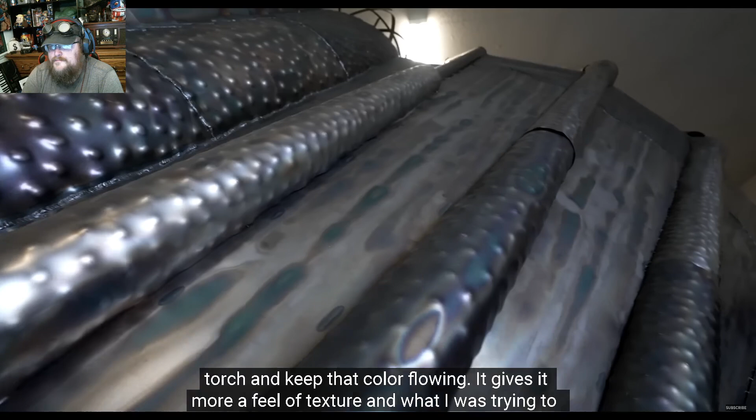This is like when we looked at that spinning stainless steel piece with the TIG, with the filler rod, and they're dabbing or whatever. That's literally what he's doing with a blowtorch, heating the metal to the proper temperature to change the color.

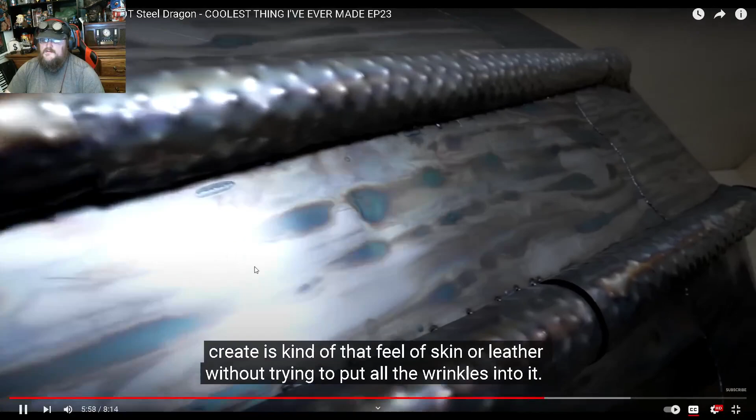Now he's keeping it relatively mild, not getting super out there with the colors, the purples and all that. He's keeping it in the blues and greens, relatively mild, just to change the feel of the texture. What I was trying to create is that feel of skin or leather, without trying to put all the wrinkles into it.

These scales represent the chest armor. But once you get to his belly or past his belly, the scales go from armor scales to full-length belly scales, which they've been laying out here.

So you can see these patterns of paper - these will be transferred into steel and then heat treated. These wrap around the belly and get layered, and there's probably 50 or 60 of them to cover the whole belly all the way to the tip of the tail.

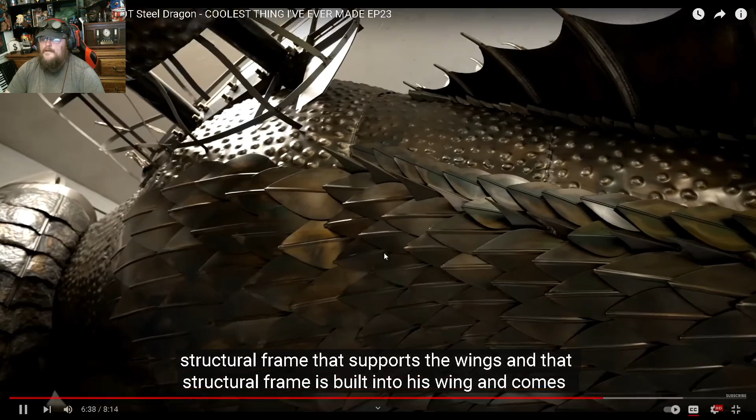And you can see up here, there's a structural frame that supports the wings, and that structural frame is built into the wing and comes down to the ground here, and eventually where his front claw is, there will be holes where anchors can be put into the concrete.

His feet are designed to be removable. I can anchor him to the concrete, slip his feet back on to cover the anchor points, and you don't see how he's bolted down.

Not many people get to see inside my sculptures, but as you can see, it's a heavy and quite a massive structural frame inside here, 10-inch steel.

Rent that out as apartment space. You got to make a living off that, man. A pretty cool little apartment space. Where do you live? Oh, in the belly of a dragon.

You know what you do about air conditioning, you know what you do about heating. That problem's solved, but air conditioning... Pipe to support the wings and the legs of the frame.

Yeah, just a neat perspective. Here we've got propane hookup. This will be hooked up, and he's got it set up so that it's easy. Looks like it's going to be fairly easy, and everything.

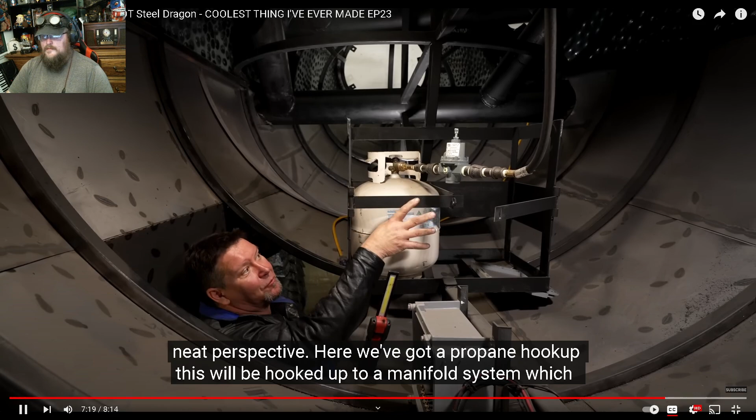He's done the smart thing in his build to make sure that when you get into the belly to replace this, it's quick, easy, and it's right there. The tank sits right there. You open it up, take one tank out, put the new tank in, and you're ready to go for the next show. It's hooked up to a manifold system, which will provide the flow of propane to the mouth of the dragon and create the flame.

Manifold system is just a fancy way of saying it's got shutoffs and stuff back here, but it pipes it all the way up there.

My lifetime achievement goal for what I do is to be known for building the world's largest sculpture.

Good luck with that, I hope you get there. But I think the world's largest sculpture arguably is the Eiffel Tower. Granted, it is a tower and it is a tourist site as far as the elevators and stuff in it, but technically it's a sculpture. That's not a building per se. So maybe that doesn't count, but I don't know.

If you do a little research into some of the pieces that have been made around the world now, they're ridiculously huge. They make my stuff look puny. So I would love to be in that category. Yeah, but are they any good?

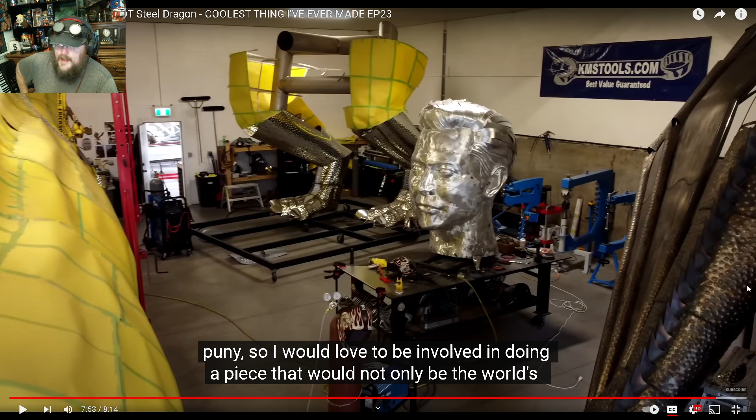I can make a 3,000 foot tall pile of poop. Just give me enough time and enough food.

What are the materials? Metal? Is it just in the metal category, or are you talking about it all together? Are we talking about Mount Rushmore, sculpture? It's huge, it's in South Dakota I believe. Yes, huge. You're gonna beat that?

Okay, why is it always bigger is better? That's my next thing. I'll tell you something impressive.

My welding instructor showed me how to, and I know how to do TIG welding aluminum foil. I can take two pieces of aluminum foil, pinch them up together, and do a little weld across both of them, welding those two little sheets of aluminum foil into one, without blowing back the metal or anything like that. It can be done.

Why does it got to be big? Can't it be small?

Involved in doing a piece that would not only be the world's largest, but something that would last, like the pyramids, for generations. Okay, first of all, it's metal. Even stainless steel does eventually rust and corrode, it's just the nature of how long it takes. It's not going to last like you think it will. Now, if it's inside, yeah, it'll last because the building will protect it before the elements get to it. Anyways, in generations.